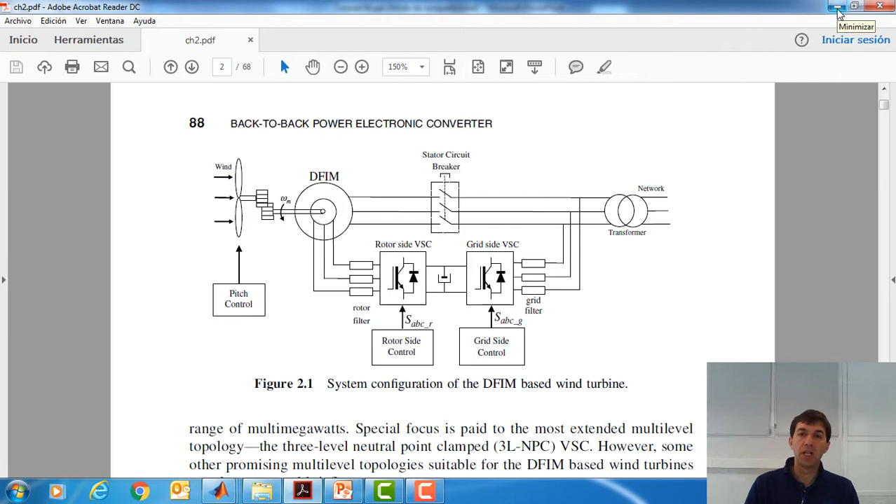And we will do it in MATLAB Simulink. So if we open MATLAB, we have already created the Simulink file from previous video tutorials, and this is our starting point.

So if we go to the power circuit, this is the thing that we need to implement. Okay, so let's go to the Simulink program. It's here. Let's make it a little bit bigger.

The first thing that we need to do is eliminate the DC voltage source, and we need to duplicate the power electronic converter. Let's rotate it and then flip the block. Yes, it's okay.

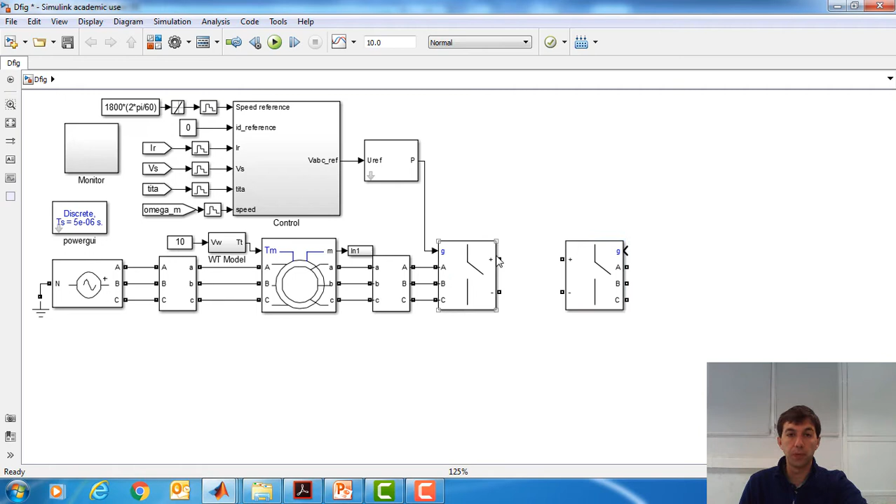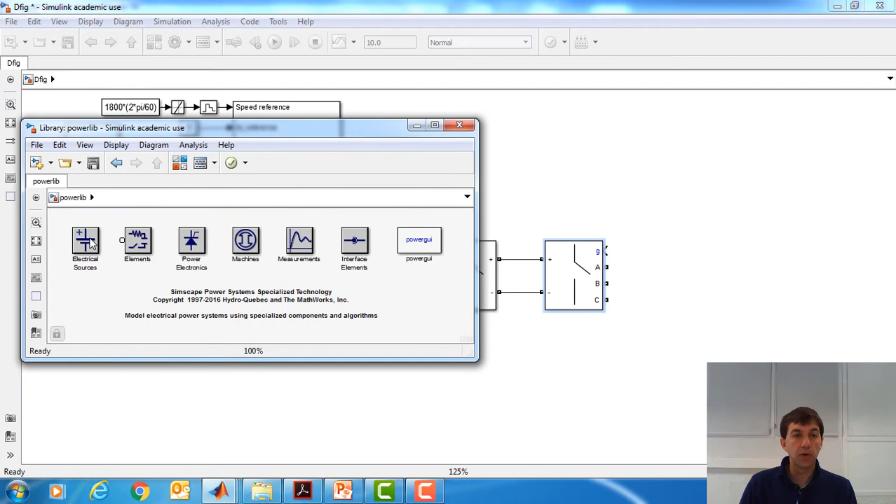Then we need a DC bus capacitance here. Therefore, let's open the library. And from the power library, that element should be, for instance, here.

So let's take one, it doesn't really matter which one we take. Let's rotate it. And we take only a capacitance of value C-bus.

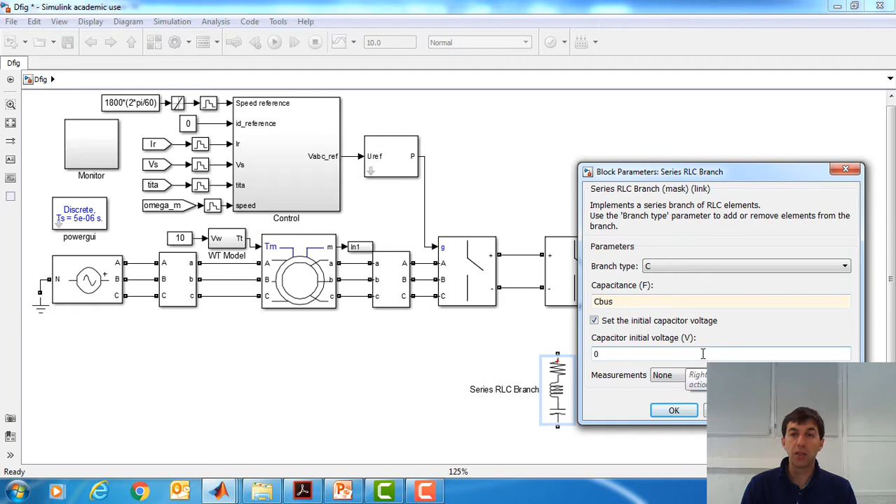We can set the initial capacitor voltage to the DC bus voltage, to the normal operation DC bus voltage, or just to 0. Let's do it at 0, for instance.

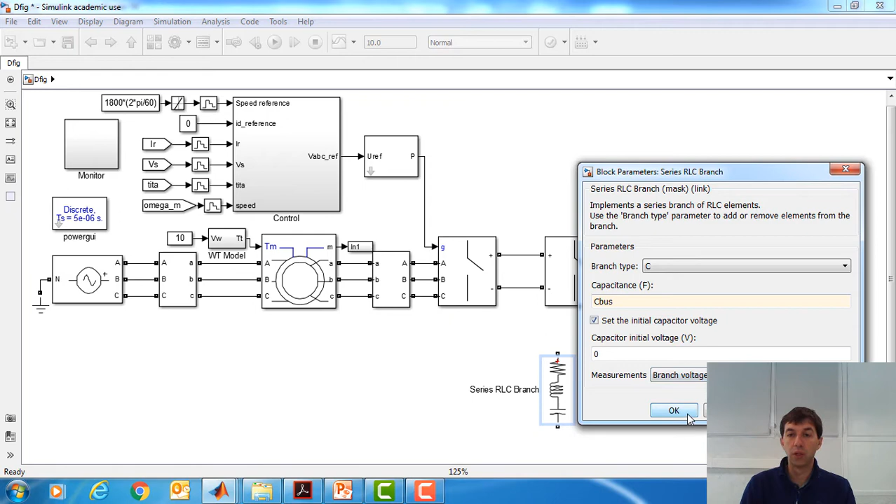And then we will need to measure this voltage. So let's take this DC voltage from this part, branch voltage of the block, which is already prepared. Then we can eliminate also the name.

Okay, we can save, and we can make this element a little bit smaller. So we can place it here.

We have the initialization program. From the previous program, I have included some new lines, those ones in here more specifically, and here is the DC bus voltage that we are going to implement.

It's a quite big inductance, but if we use a capacitive and inductive filter, a combination of capacitance and inductance, we could make the series inductance a little bit smaller, but this is not the objective. And here we have some other parameters related to the control that we will speak about later. Okay, here we have this.

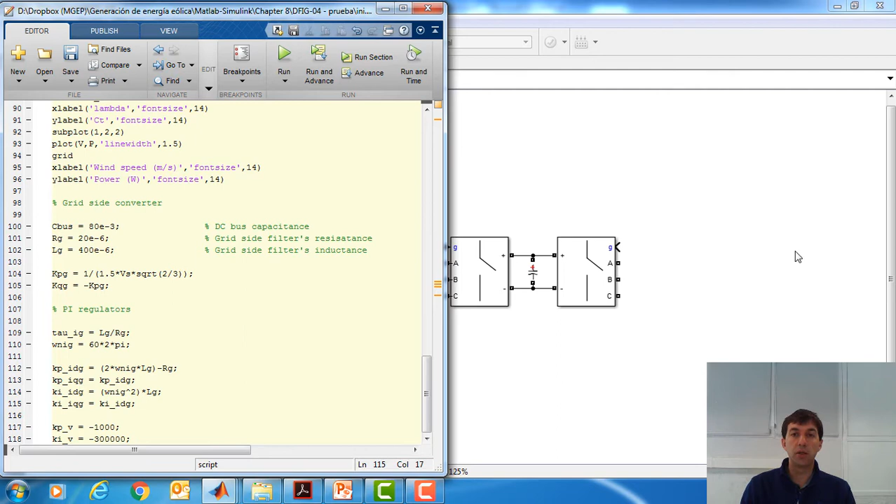Therefore, we need, as we have said, some more elements related to the filter. So we can use again this element, copy it from here, make it a little bit bigger, and we will use, as said, resistance and inductance filter.

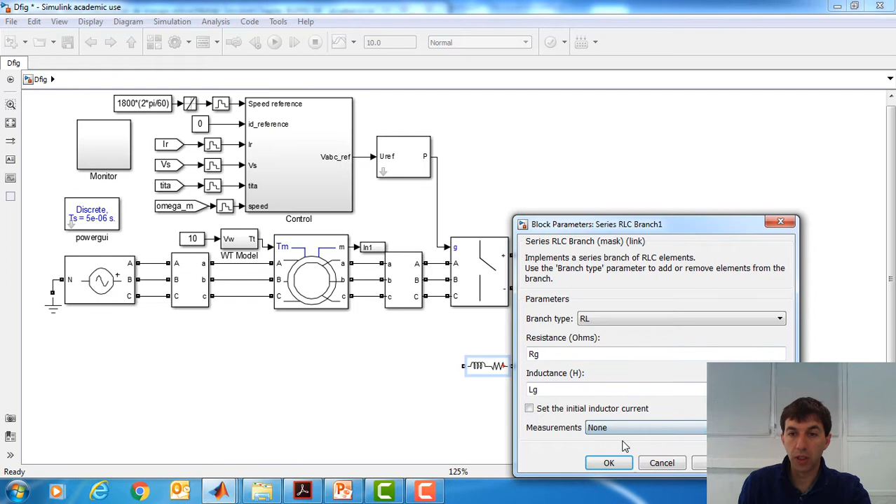RG and LG, if I'm not wrong, sorry. And we won't use any measurement in this case. Let's do it that way, and let's check where it is. Here it is, yes, the two names are those ones.

Okay, so we copy them. This is the filter that must be placed between here, here. We need a little bit more space for this third wire, and here.

Then we need a measurer that could be taken from this part, and this must go to the filter. This is A, yes. This is B, yes. And this is C.

A, B, C, and B. C, B, and A. Okay.

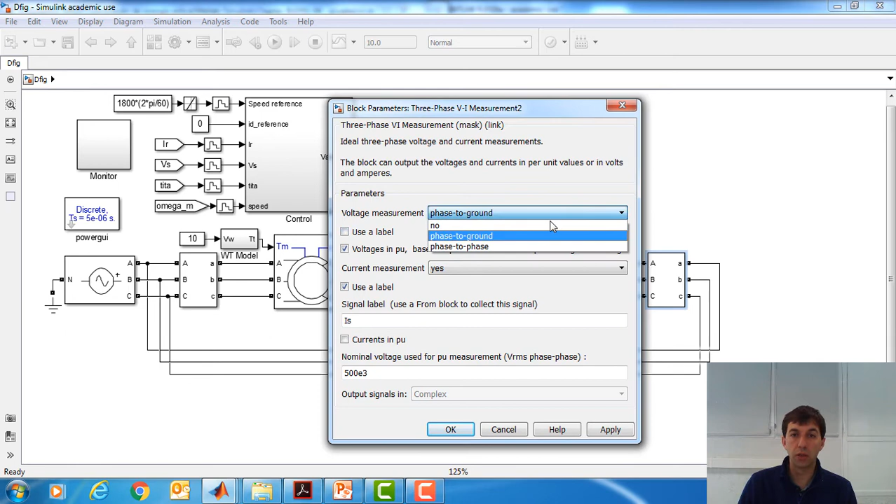Let's call this, we won't use voltage, and let's call this current IG current.

Okay, so this is the power circuit, and what we need now is, in order to operate here with the grid side converter and rotor side converter with real voltages, we need to place a transformer into the rotor side.

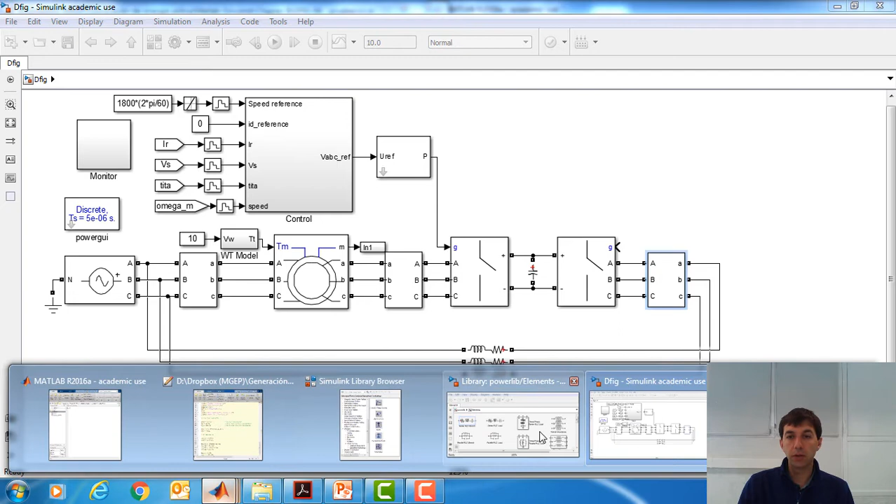So let's find the transformer in the library, which is probably here. Let's make it bigger. Yes, this one.

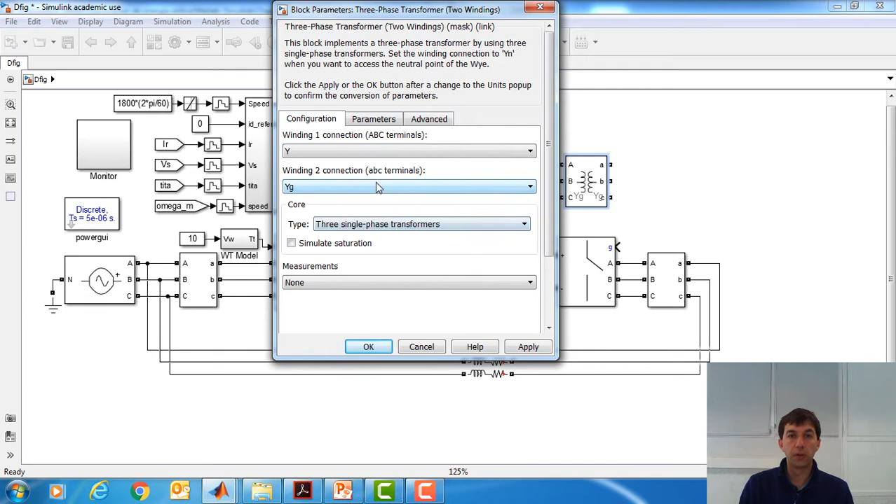We remove the name and we choose a simple transformer like this, with parameters that don't really matter, but anyway let's do it this way, and let's open again, let's show this file again.

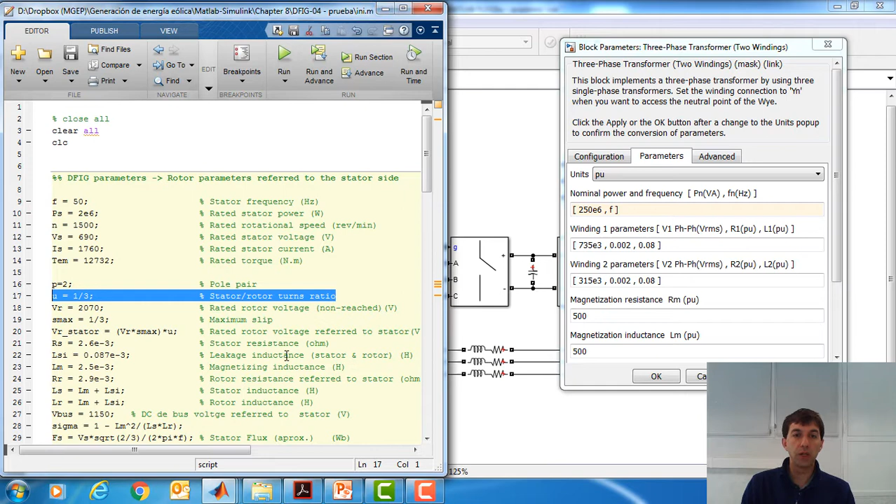Just remember that this machine, this doubly fed induction generator that we are using, has a stator and rotor turns ratio of 1/3. So in order to simulate this fact, we need to include in series with the power electronic converter, between the generator and the rotor side of the generator, this transformer.

So let's make a little bit of space. Like here. Sorry, SI units, for instance, and this is okay. So we need to place it here. Let's make it a little bit smaller and a little bit bigger.

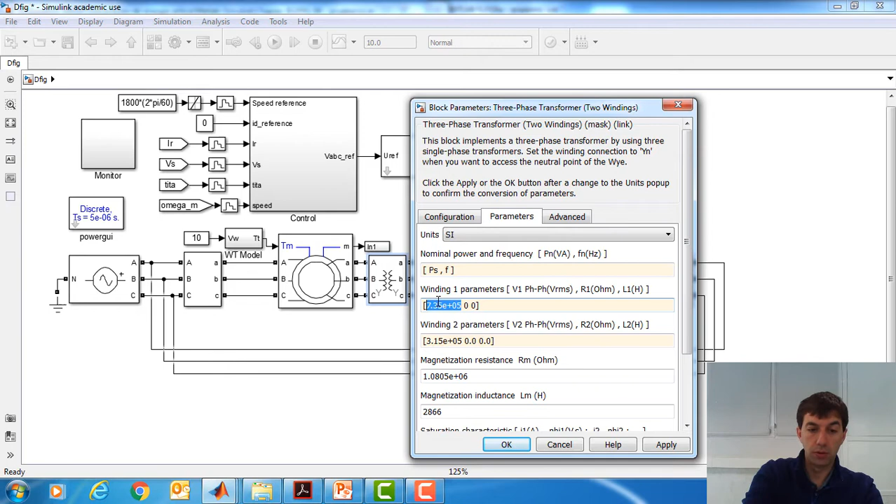Seems that everything is already connected. So the parameters were F. We can put here PS, which is active power, and this we are required to introduce or to put here volt amperes, apparent power, but it doesn't really matter. Which is important is to place or to do zero the parameters.

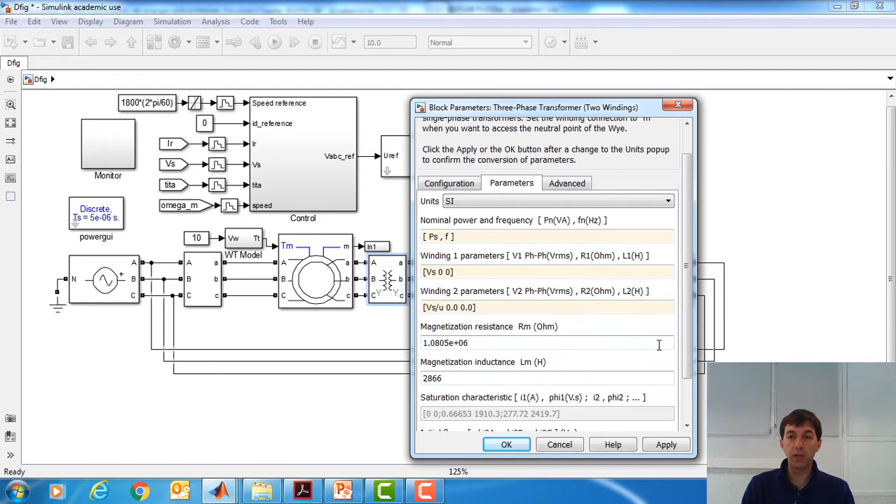Since the only thing that we need is the relations between voltages of the primary side and secondary side, so with this we have an ideal transformer. Let's leave the values of the magnetizing resistance and magnetizing inductance at very high values, so here the only effect of this transformer is just to implement the stator and rotor voltage relation.

So okay, so there we have. Okay, let's continue then, doing a little bit more space. Okay, it's enough. So we need to continue now with the modulator, I guess, because the power circuit is already implemented. So we just copy the modulator, the PWM modulator from here.

One thing that we are going to do is to set the initial phase of the triangular to zero, because in that way we eliminate some asymmetries that maybe in this grid side converter will be more remarkable. So let's do it at zero and just do the same for the other power electronic converter for the rotor side.

Then we need to implement the control. Let's see the power circuit from the book. We have already created the power circuit, and we need now the grid side control, which is going to be very similar to the rotor side control. Therefore, one simple thing that we can do is just copy it from here to here.

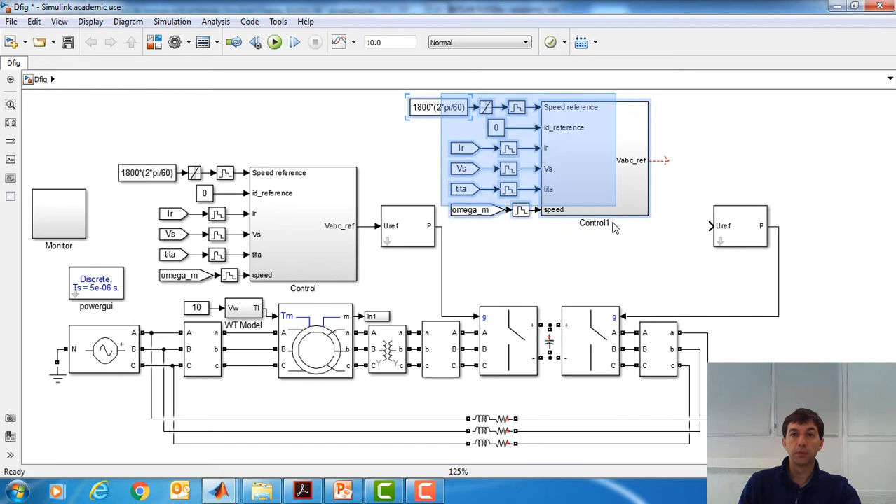We need some more space. Somewhere like this. More or less there. This is not connected. Yes, now it's connected. Let's move there. Okay.

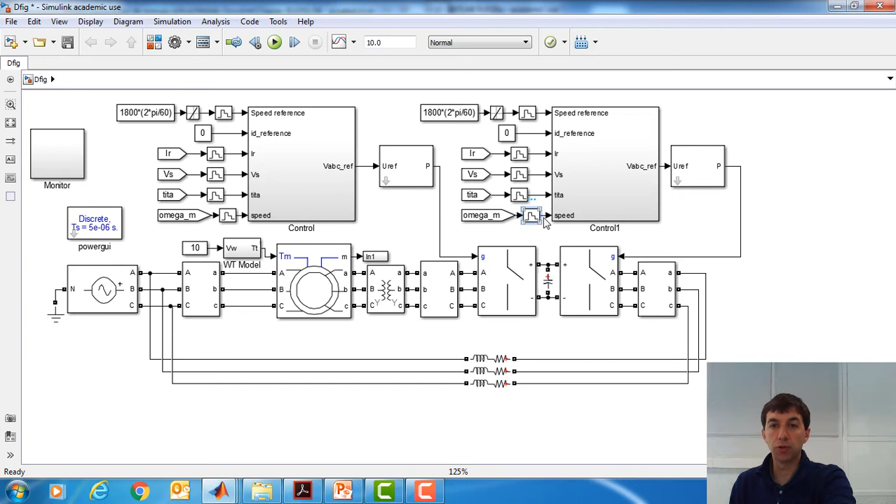So what do we need from here? Basically omega, we are not going to need it, therefore this is not useful. Neither theta. Stator voltage is going to be necessary.

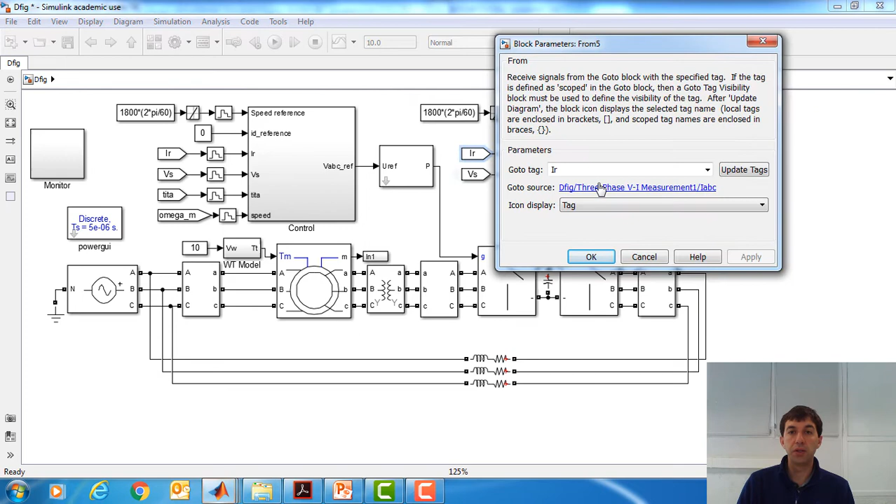Okay, so let's go back to the program. So we will need IG, which is this current, okay, and it must be positive going out from the converter to the grid. So it's okay. Then here we have the stator voltage.

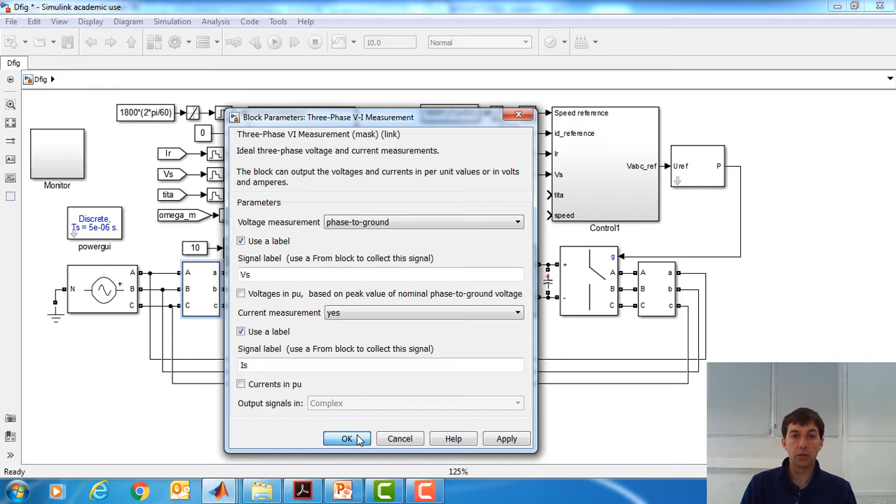This shouldn't be now in per unit, should be in units, because later we will see that we are going to use it, this voltage, at the controller strategy itself. So this is, and then what we need is the DC bus voltage.

Okay, so let's go inside this part. Let's do it bigger. Okay, so one is DC bus voltage. This is going to be QG. This is going to be—we have said that we don't need the speed, we don't need theta. This current is going to be the grid side current, and finally this is the voltage.

Okay, so we don't need this block anymore, we don't need this, we don't need this, we don't need this. Yes, okay. So now this is the block.

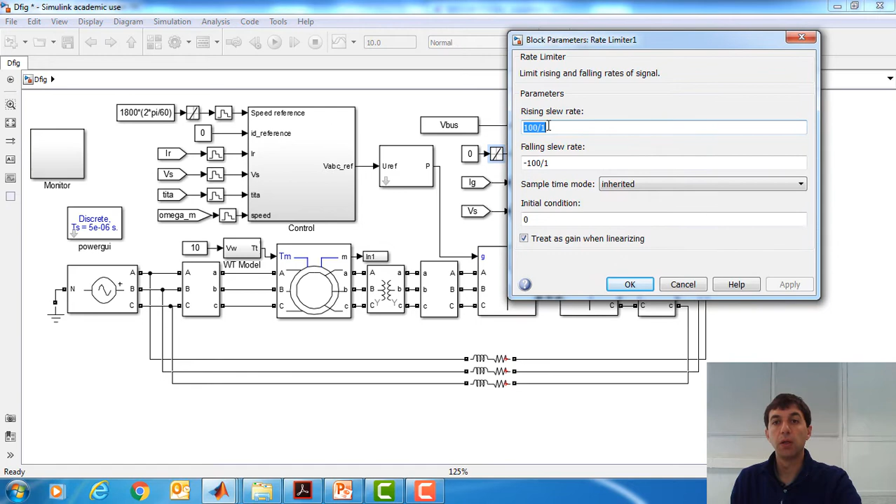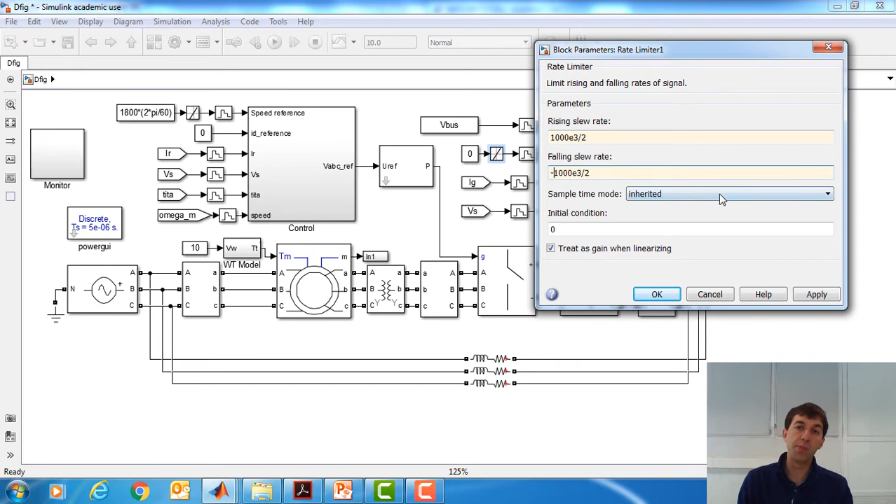Okay, so here we can put the Vbus. We don't need the rate limiter. But here at the reactive power reference we could use it. And let's put, for instance, 100 kilovars per second, or 1000 maybe in 2 seconds, and the same in negative, 1 megavar in 2 seconds. Later we will check if this is a reasonable slope or rate limitation.

Okay, so let's continue implementing the control. Okay, so first of all we can check, for instance here we need to estimate the angle theta of the grid voltage. Therefore we need to come to this block. We don't really need this, we don't need this, we don't need this, and neither this. And this is theta of the grid.

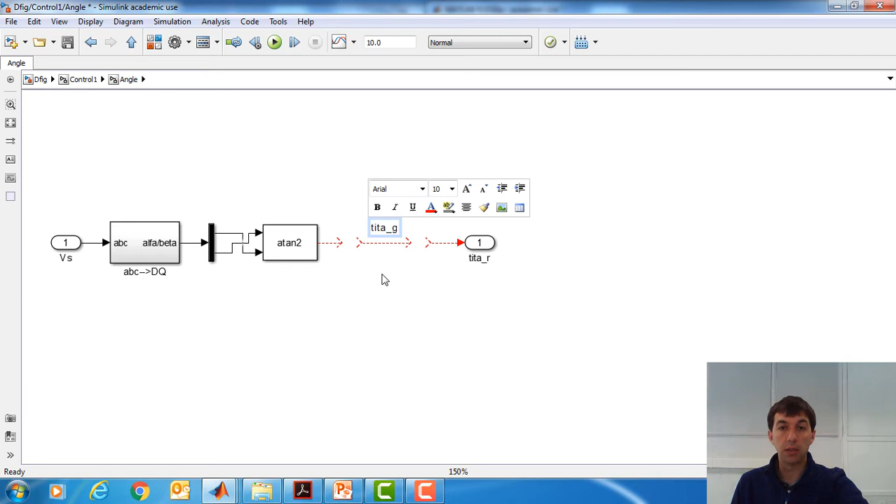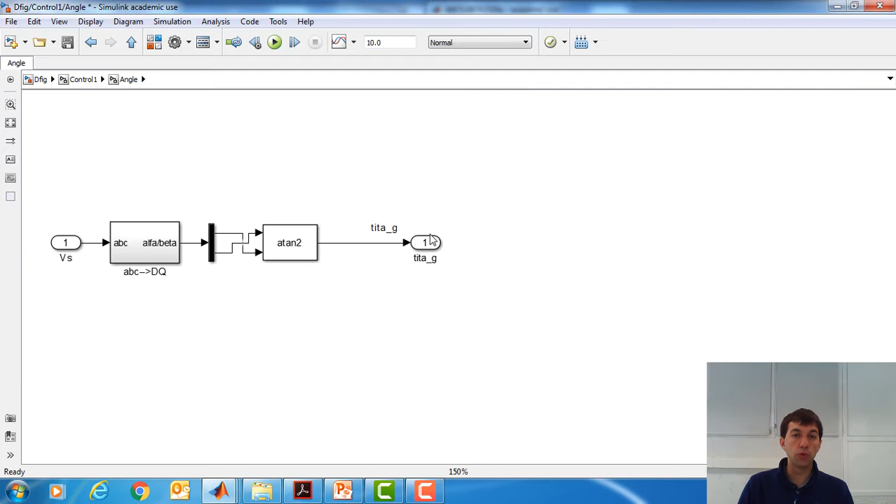It is more recommendable to use a PLL, but as we are going to perform a very simple and initial stage simulation, we are going to estimate the angle theta of the grid very simply with this element.

This is alpha and this is beta. So we are going to use the transformation from ABC to alpha beta, and then calculate the angle directly with an atan2 function.

So this is the plot now, very simply. Then here we need the grid side currents in alpha beta.

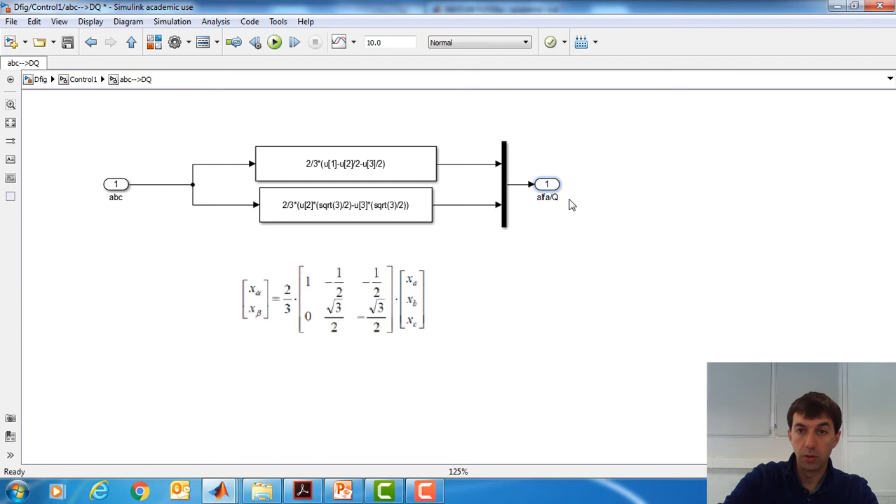Again, we are using the same transformation, but we give different names to the coordinates. This is alpha beta, this is alpha beta, and this is alpha beta.

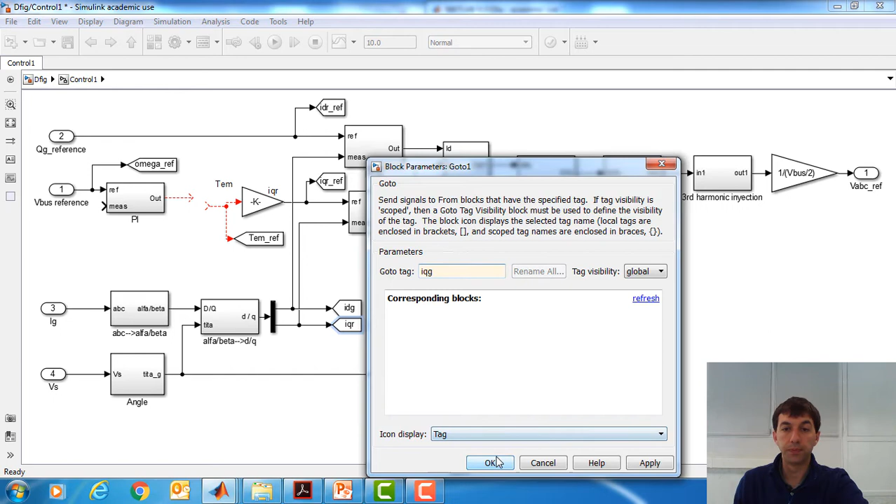So everything is correct. Now let's call this IDG global, okay, and IQG. And the opposite transformations should have the same names.

Alpha beta, alpha beta. This transformation is like this. Sorry, here... there we go. I think that everything is okay.

We can save. So now these are going to be the currents. Yes, so let's continue from here.

For instance, the current references are going to be IDG and IQG, since we are working with the grid side converter control. Let's have a look.

So here it is what we have already implemented. From the DC bus voltage, we need this PI regulator, and here we need a constant.

We need to connect it here and connect it there. Here is going to be this label, like this. Okay, I have forgotten to put here a new input, the DC bus voltage, which is coming from here, we have said.

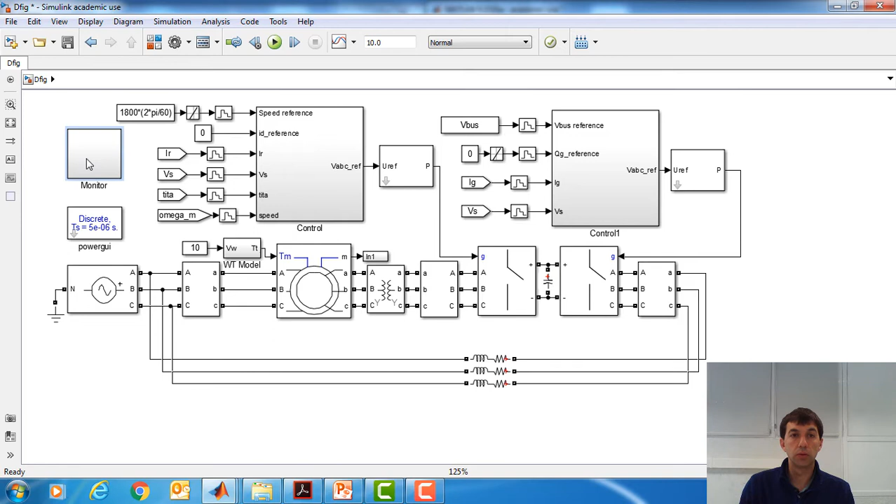Okay, so let's do it from here. For instance, let's go now to the library, not this one, but this one.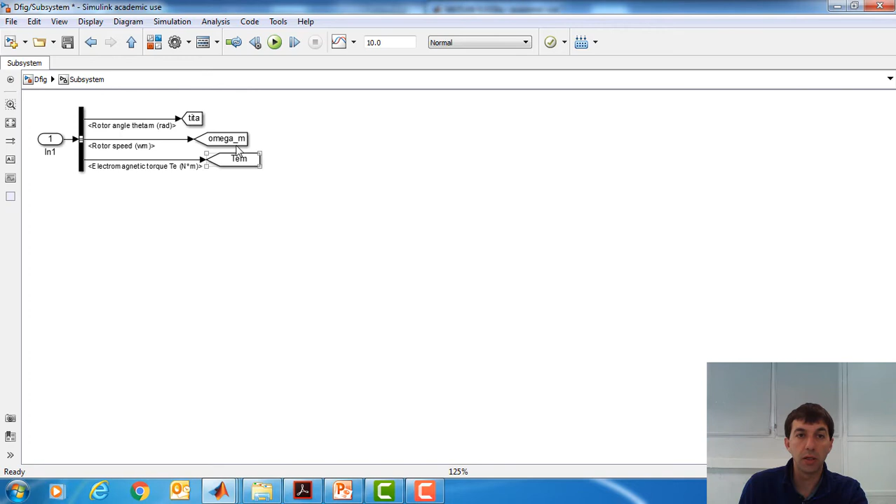And we need a measurement. Yes, let's use the multimeter, and we will use another front to block that we can take, for example, from here.

Let's go back there, and this is going to be the DC bus voltage that we can call in this way.

So we need to associate from the only series RLC branch that we have.

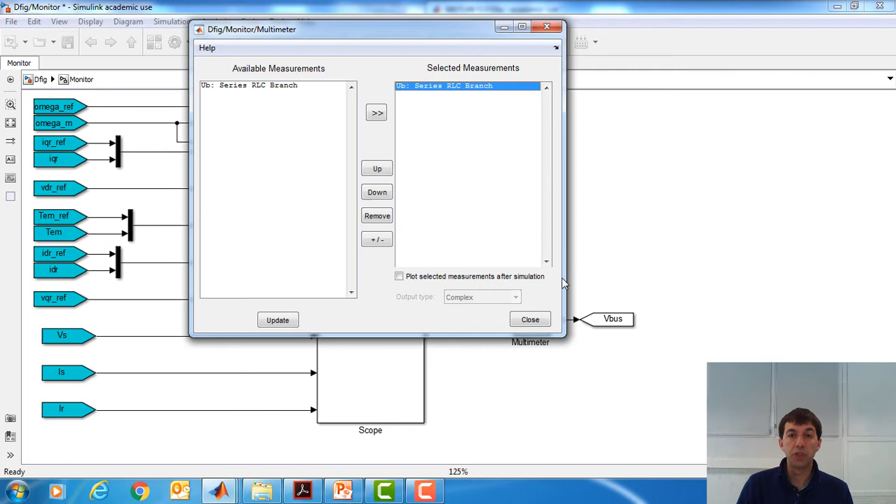Okay, we will take the voltage. Okay, and later we will use it.

Just here. So let's take it, for instance, let's take another input, paste, and this is going to be the third one, fourth and fifth. Okay, and this will be DC bus.

Let's put it there and let's connect to the PI controller. Then this reactive power reference is going to be directly connected.

Sorry. And this is going to be, not torque anymore, so QG reference. So this is not necessary, it's obvious, and this is going to be IQG. So I think that everything is here.

Okay, yes, this is what we have. We can save.

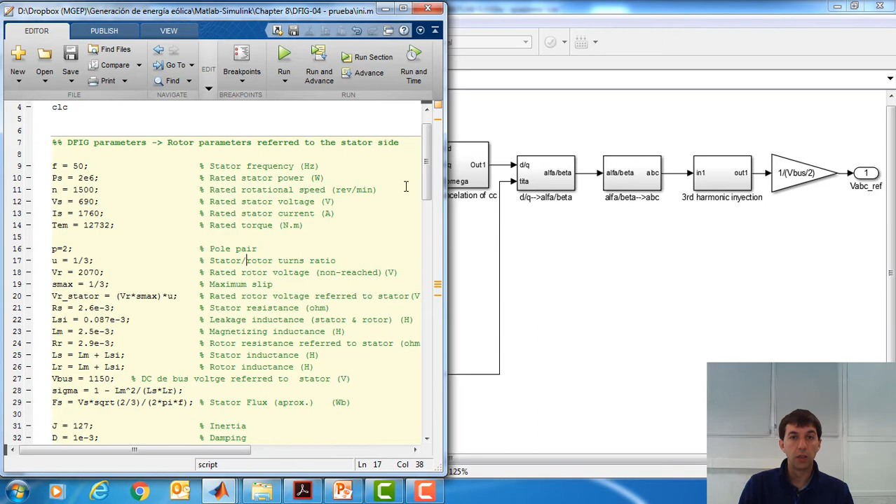Let's go to the initialization program again, and let's go to the last lines that we have included. Here we have the constants that we need.

This is 1. Sorry. And this is the other one for the reactive power.

Okay, then we need to set the parameters for the PI regulators. In this case, there we have the DC bus voltage regulator.

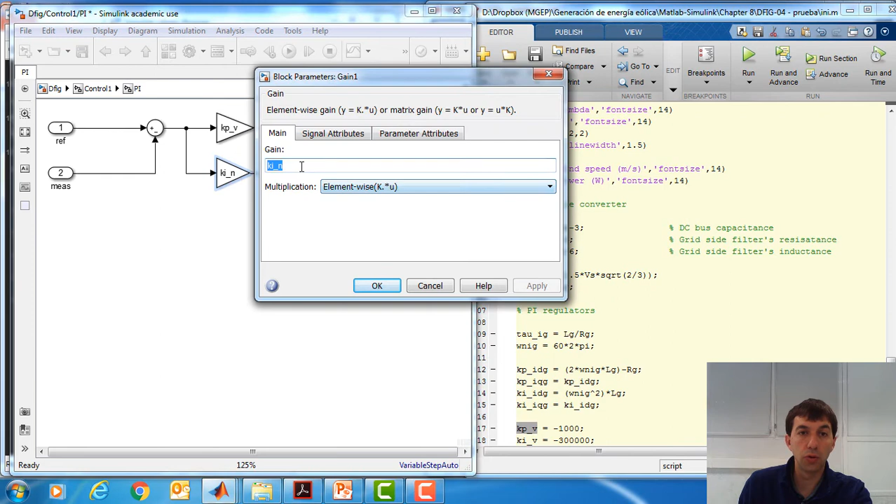This is going to be, okay, the proportional gain, and this is going to be the integral gain.

The output of this regulator means here active power, and therefore we could put here as limitation, here we have the active power, and we have a maximum S equal to 1/3.

So let's say that we have PS multiplied by U, by S max. Yes.

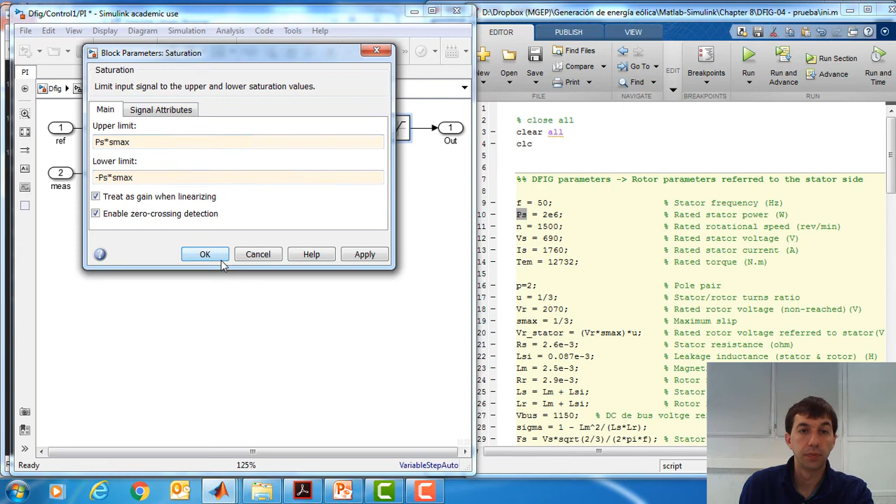In positive and in negative, the same. Okay. Initial condition, okay.

So the maximum active power that should go through the rotor side converter will be the maximum rotor power, which is given by this value that we have set here.

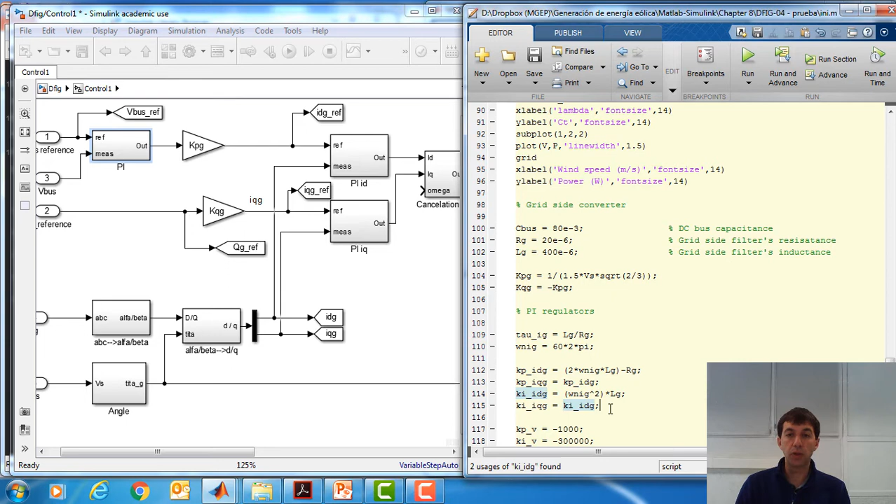Okay, let's continue with these PI regulators. Let's go to the current regulators, and here we have tuned the proportional and integral gains according to this very simple criteria, which is the same that we have used for the PI controllers of the rotor side converter.

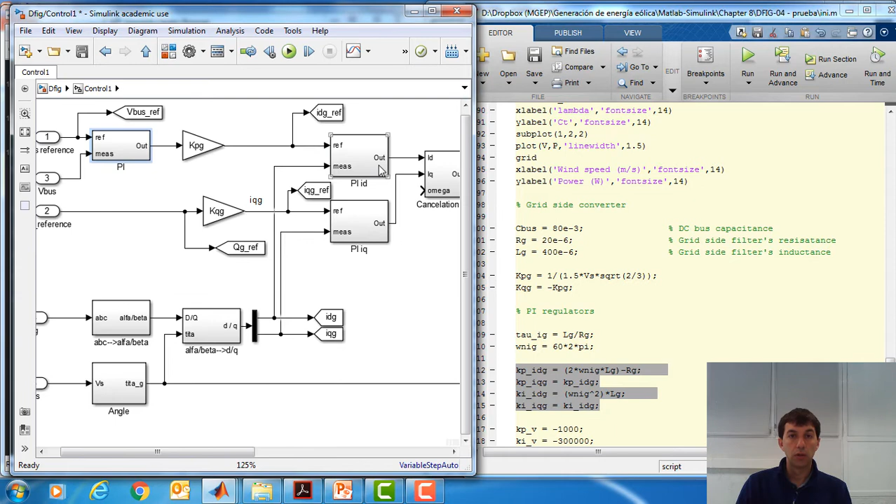So let's call IDG, okay, same names but with G. And the maximum voltage, the limitation, the saturation should be the same here and here as well.

Okay, this is for ID and the same for IQ. Well, the same values are useful, so Q,G, and here Q,G.

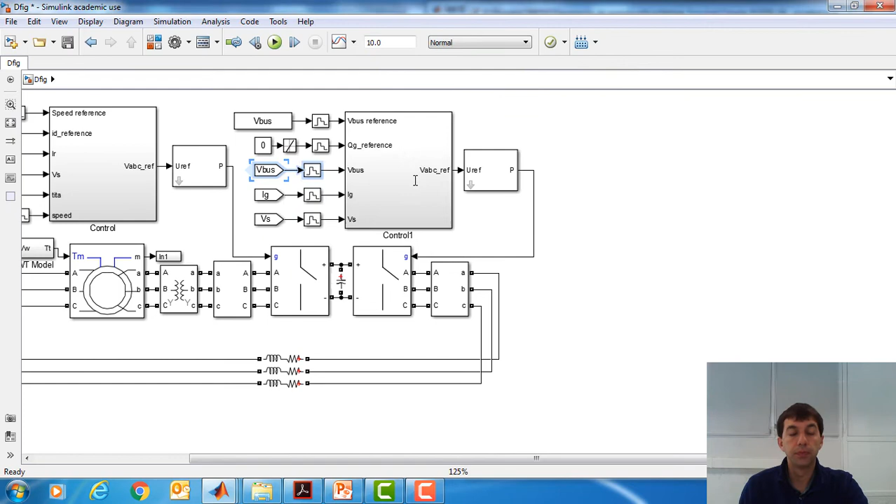And here now what we need again is to put here the new input, which is the DC bus voltage, according to its name. Okay, so I think that everything is there.

Yes. What else is missing? Okay, those are the constants. IQG, IT. Yes, the coupling terms.

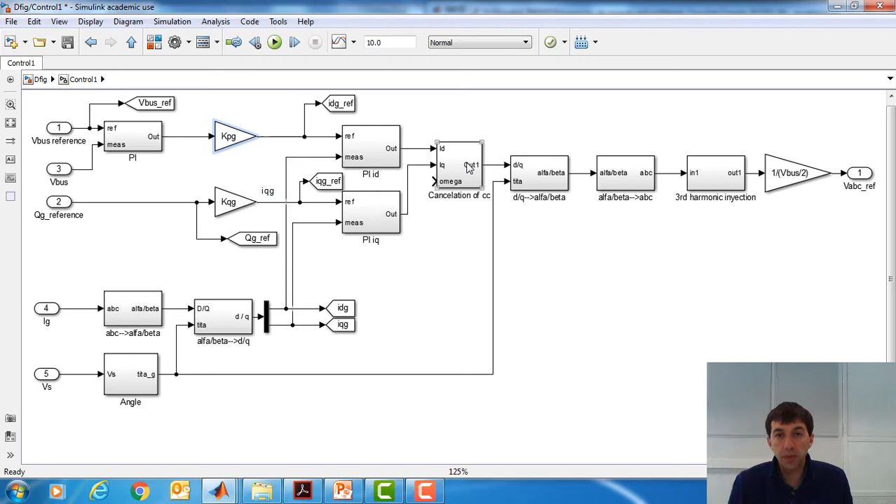If we go to the coupling terms, we need to add these two values. So, okay.

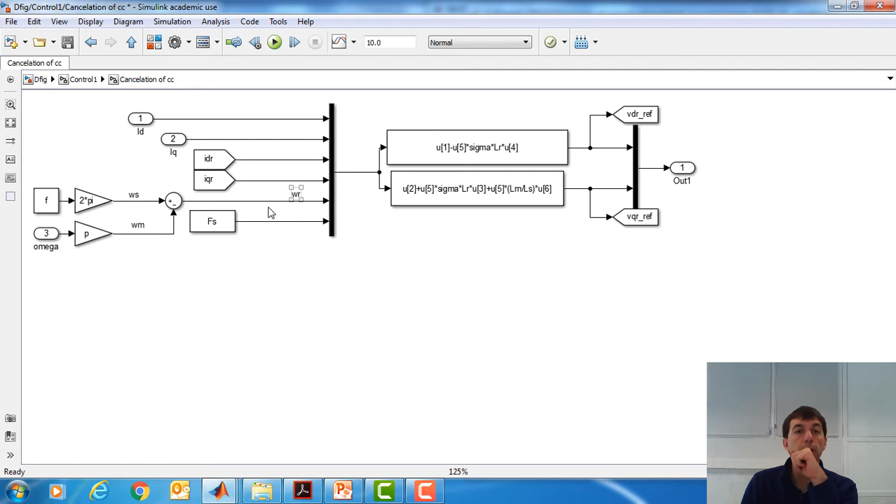We need to do some modifications here. What we need here is IDG and also IQG.

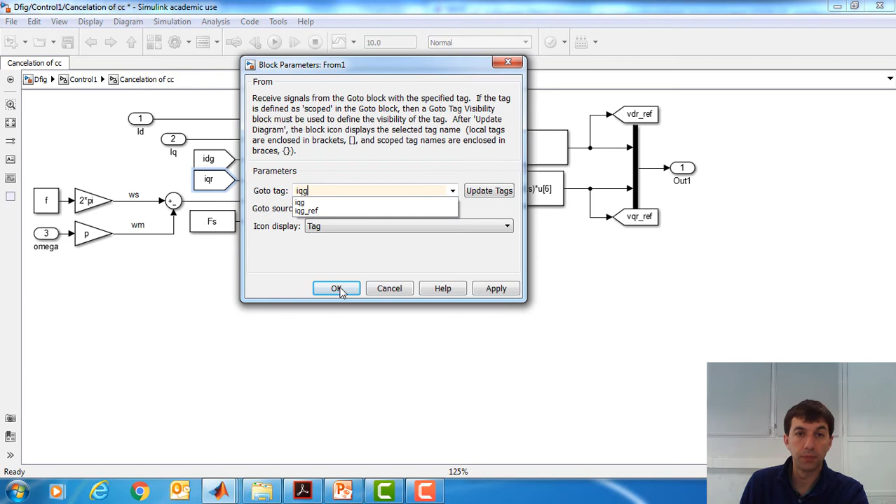Okay, we don't need this anymore. This was for the machine. Okay, so we need only 4 inputs for these multiplexers.

Yes, like this. And here we will have the coupling term, okay, this is U4, which is IQ. This is LG, the grid side converter filter.

And here we could put this value. Let's copy this side again because it's going to be very similar here, but in this case in positive.

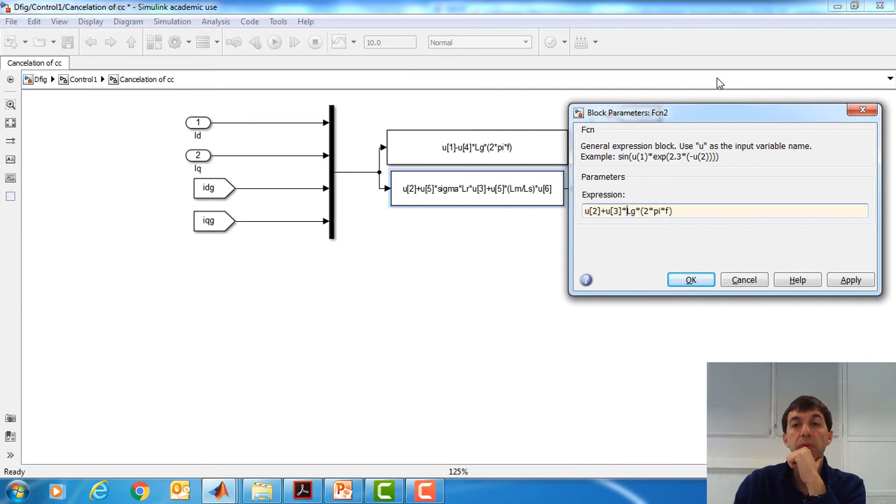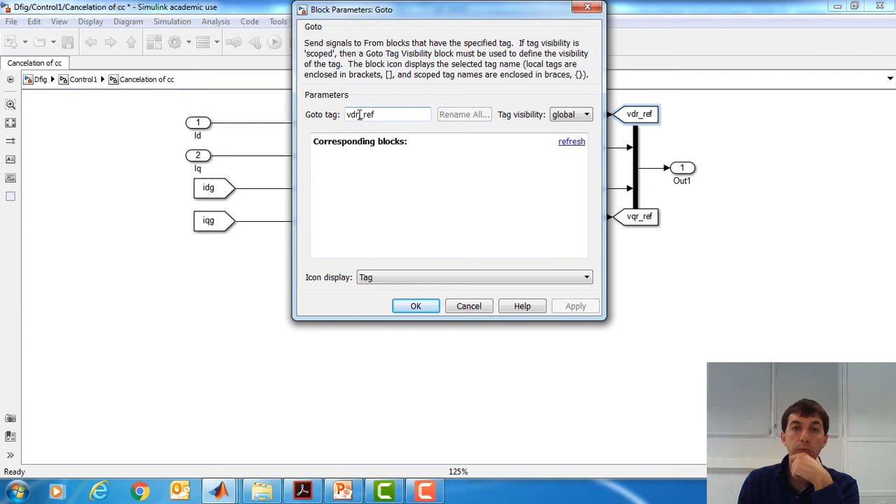Sorry, and this will be U3, LG and positive. Yes, this will be obviously not rotor voltage, but grid side converter voltage, and the same for the Q component. And that's all, I think.

Here we do the cancellation of the coupling terms. Here we have the third harmonic injection, nothing changed, and this is the voltage reference.

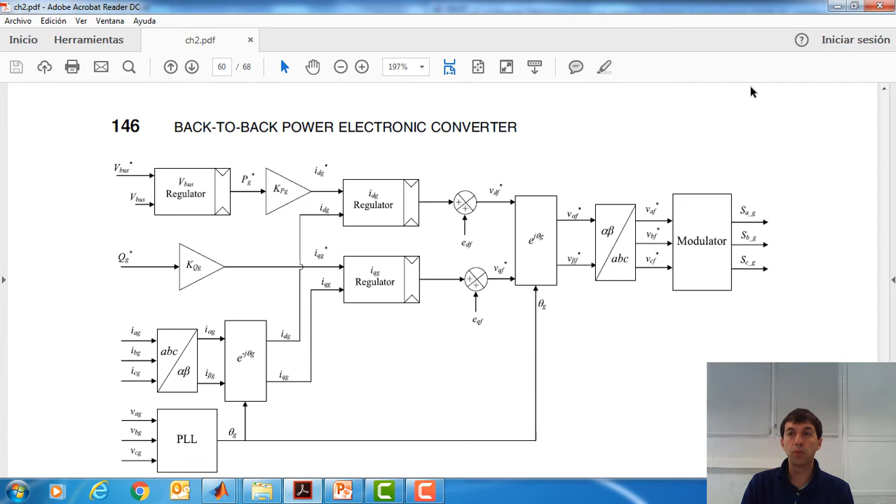Okay, there is one thing missing here, which is the grid side voltage compensation. We can do it, for instance, if we take one block like this from here, and just before this block we are going to add directly the grid side voltage, that we can take from the entrance, from this input in here.

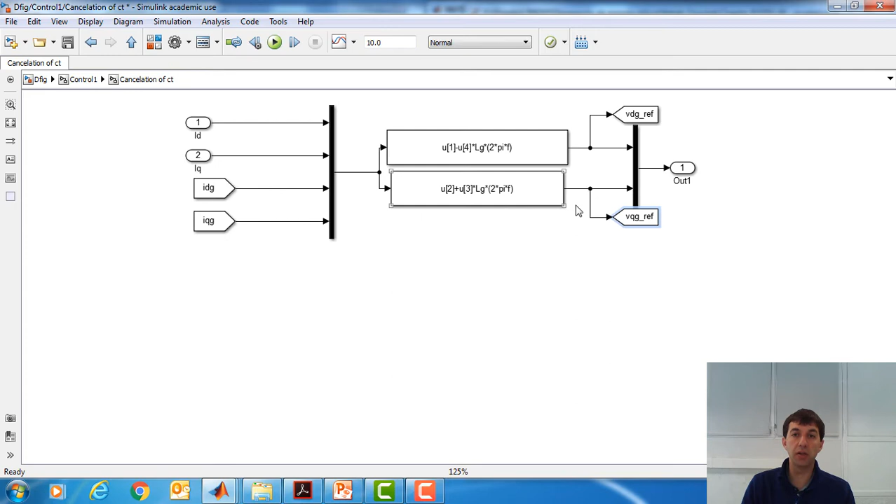We could cancel this grid side voltage, or help to the PI controllers, just here in DQ, but we can do it simpler in ABC, just add the output before the third harmonic injection. Okay, so I think that everything is already connected.

Let's have a look at the initialization program. Okay, so now we need to prepare the monitorization or the scope. So let's copy just directly from here in order to be simple. Like this.

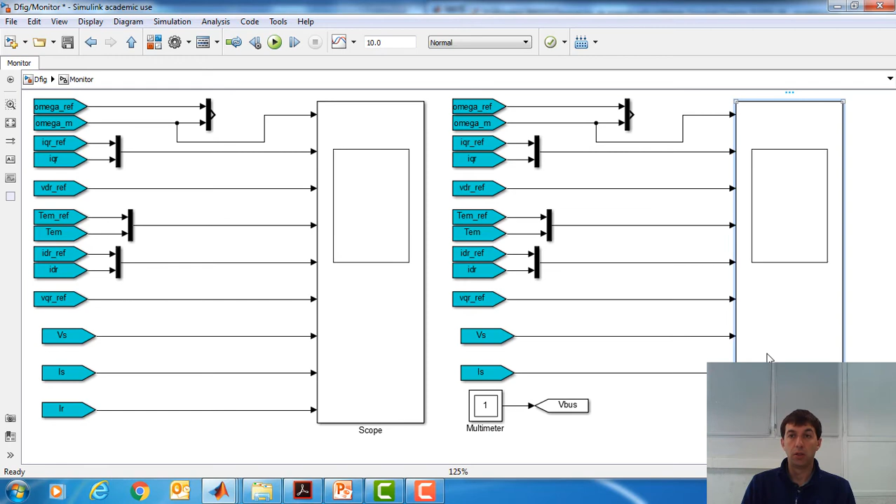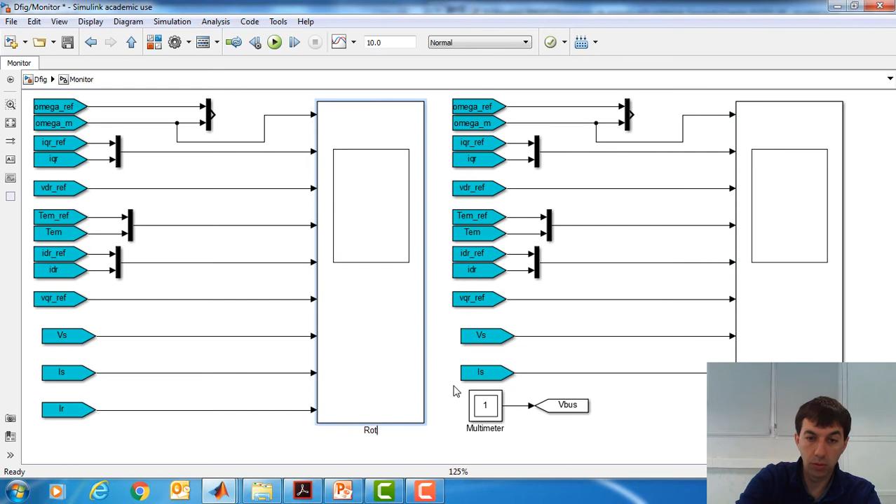And we could use the same structure as we did for the rotor side converter. We could use, for instance, yes, this is going to be grid side control, this name, and this is going to be rotor side control.

Okay, so here we could use, let's put it there, and this is the one that we are changing, grid side control, and this is grid side control. Okay, so we could say that this is going to be DC bus, and this is going to be DC bus. What happened? Didn't work.

Okay, so this is going to be its name, DC bus, reference and actual value. The DC bus voltage is controlling ID in this case, so this is going to be IDG if we want, IDG.

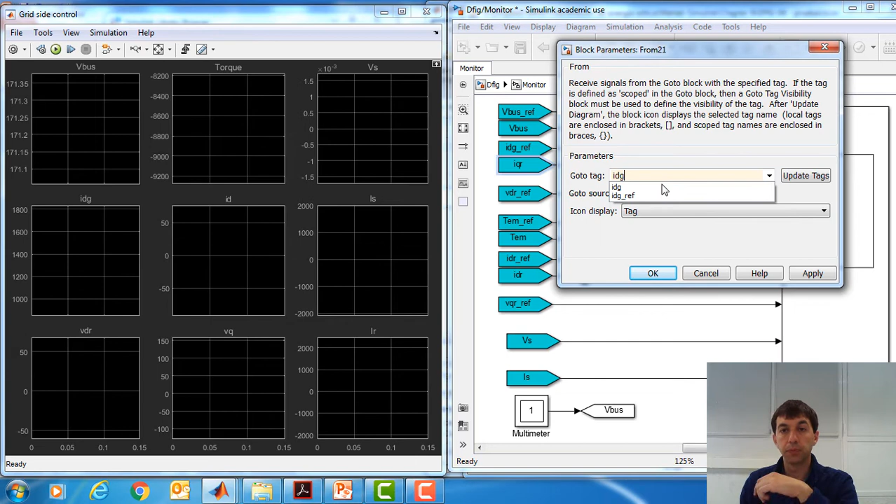Therefore this is going to be IDG, and this is going to be IDG. Sorry. Okay, and this will be VDG reference voltage, that we are taking it from here. Sorry, it is there, it is there, should be there. Okay, perfect. Let's go back to this window. Here we are. So this is its name, VDG.

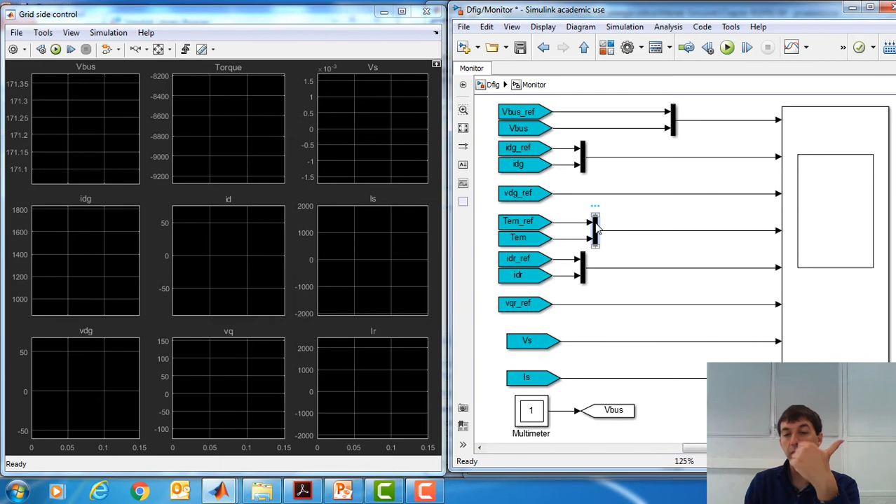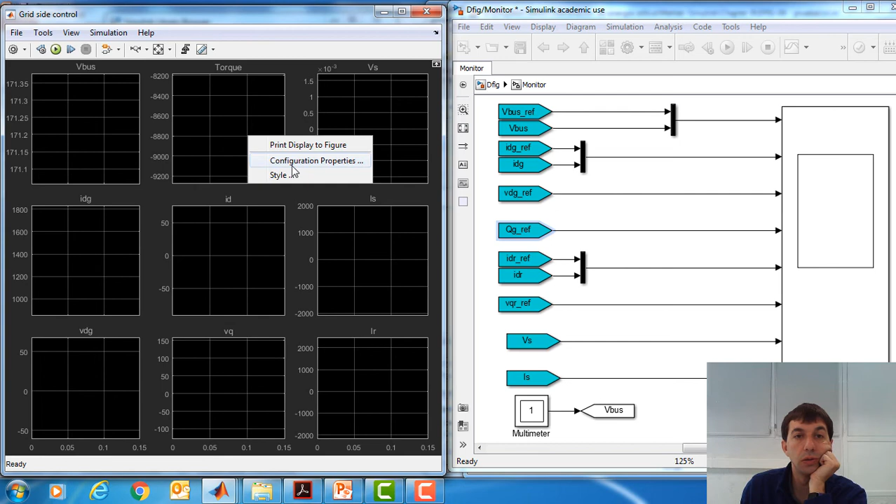And here we could put the reactive power. We just can watch the reference that we have called QG ref. So this is QG, in this case only reference. Okay, this will be now IQ. Yes, Q and grid. Okay, perfect.

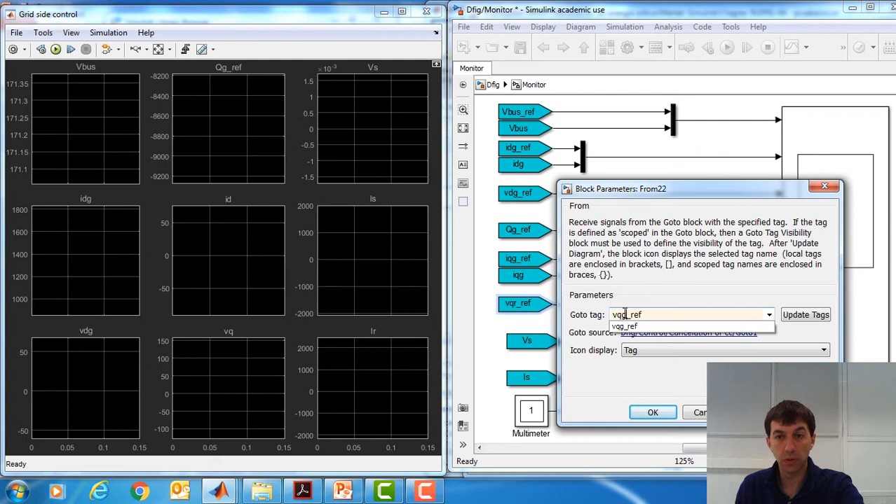And this is going to be IQG. Okay, perfect. And therefore this is going to be, yes, QG. Okay, so the names are wrong. IQG. Okay, and this is going to be VQG.

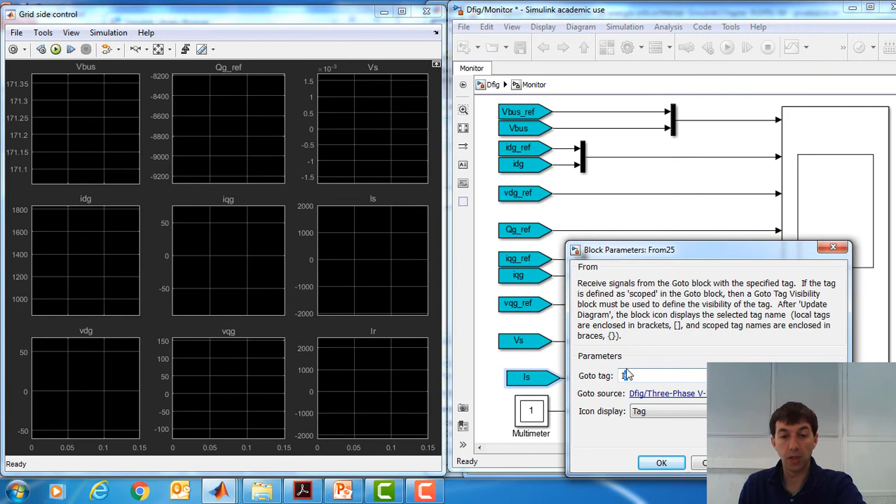Okay, here we could leave the grid voltage, and here we could use IG. Therefore, let's call it in that way, IG, the grid side currents, and here we won't use any variable. We will not use this element. Okay, so let's save this element. Let's check again. So everything should be ready. This is the grid side control, and this is the rotor side control.

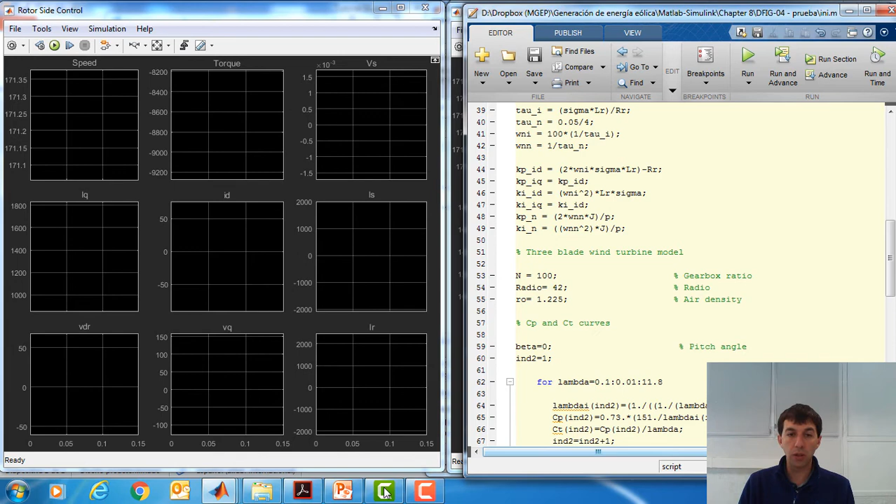Okay, let's go again to the initialization program. Let me emphasize that as we are going to do a startup of the machine, of the generator and the wind turbine, very strong, let me say, we are going to start up the grid side converter, the rotor side converter, the wind turbine model, everything all together at the same time.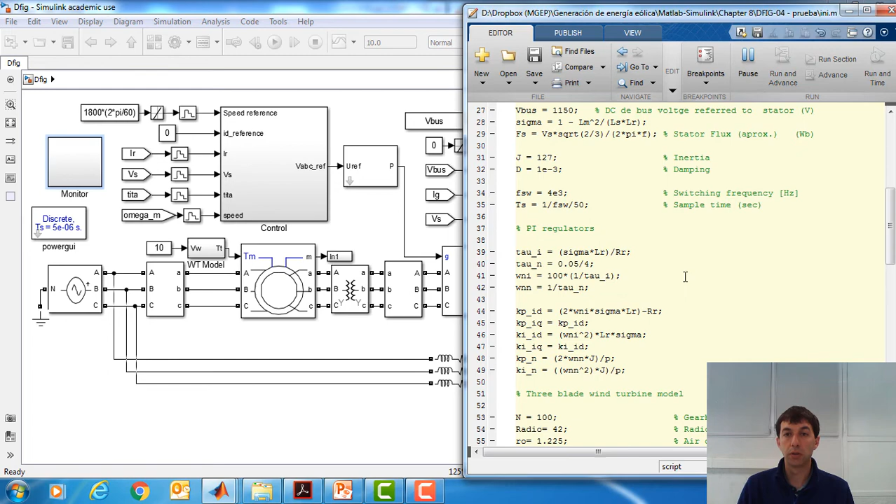Let me put the inertia as we have at the beginning, a little bit bigger, 127 kilograms multiplied by meter square. So we can run the program. Yes. So all the variables should be there. Okay. There we have all the variables already loaded there.

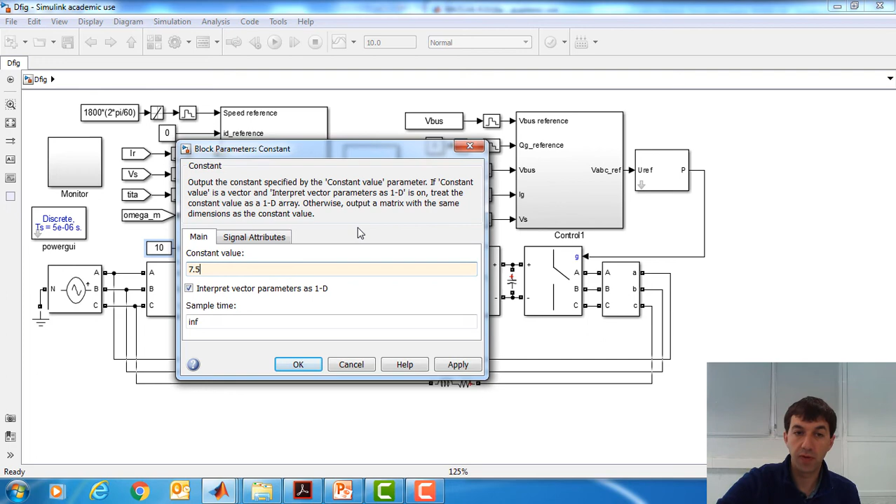And for instance, let's start at, let's say, for instance, 7.5 meters per second of wind speed. So this is 7.5, just to do a different value. Here we have the maximum power point tracking. Oh yes, there is one thing missing here.

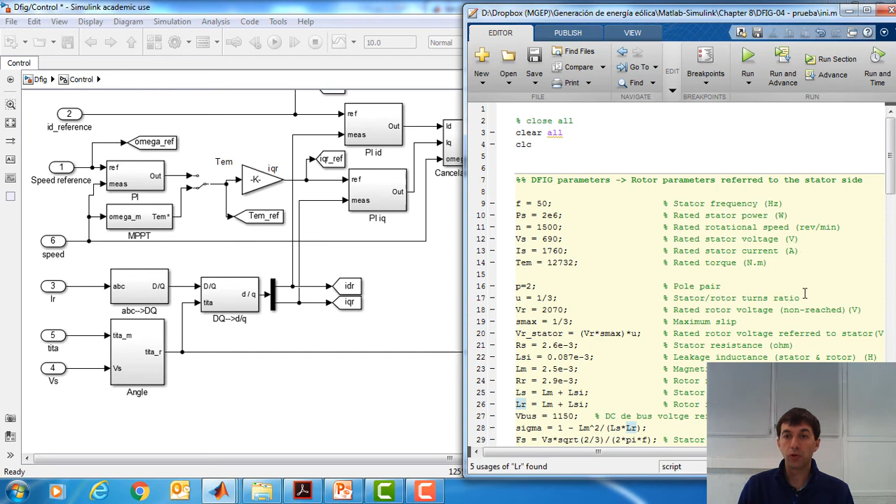As now, here we have the maximum power point tracking algorithm working. As we have introduced real rotor voltages and currents, here now the rotor side control should consider that. So very simply, we need to divide by U, which is the stator rotor turns ratio of this generator, and here should be placed at the rotor currents, and finally, again, let's do a little bit more space if we can.

We should do the same at the output voltages. So the control strategy itself works with the generator referred to the stator, but then it creates the output voltages, real output voltages, therefore referred to the rotor, obviously, and the current measurements are real measurements, so obviously referred to the rotor. And the parameters of the generator should be still referred to the stator. So we left them as they were.

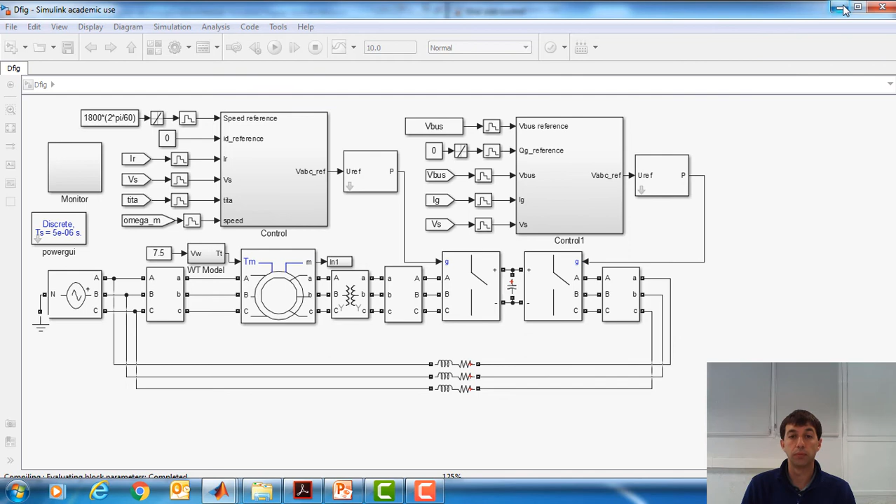Seems that is running, so we have been lucky. The simulation is running, and as you have seen here, there is a big overshoot of DC bus voltage.

This is because the startup that we are doing is very strong. We are not making a realistic startup because we don't have time to focus on it. And during this startup, the rotor side converter and the grid side converter reach their stable operation point, so the DC bus voltage is going down.

At the maximum active power that we have set, this is the current that it corresponds. So the system is running. Let's wait. And now it seems that the current loops are working.

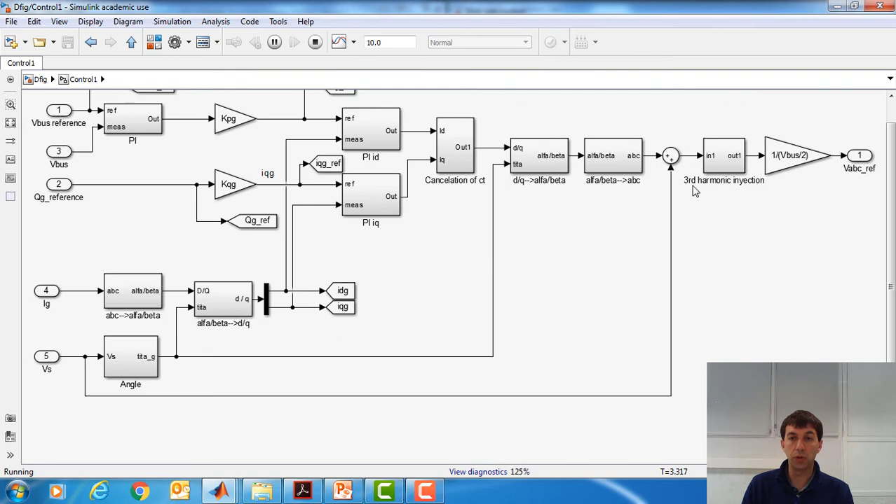In order to do that, we need something like 190 amperes at D current. These are the sinusoidal currents, and these are the voltage references. Very small voltages because, as you remember, we are using a feedforward voltage of the grid voltage. Therefore, what we are watching is just these voltages right here.

Okay, so more or less we have reached the steady state, and let's now simulate a different operation point at 11 meters per second of wind speed. In this way, the MPPT control algorithm operates with more torque and higher speed.

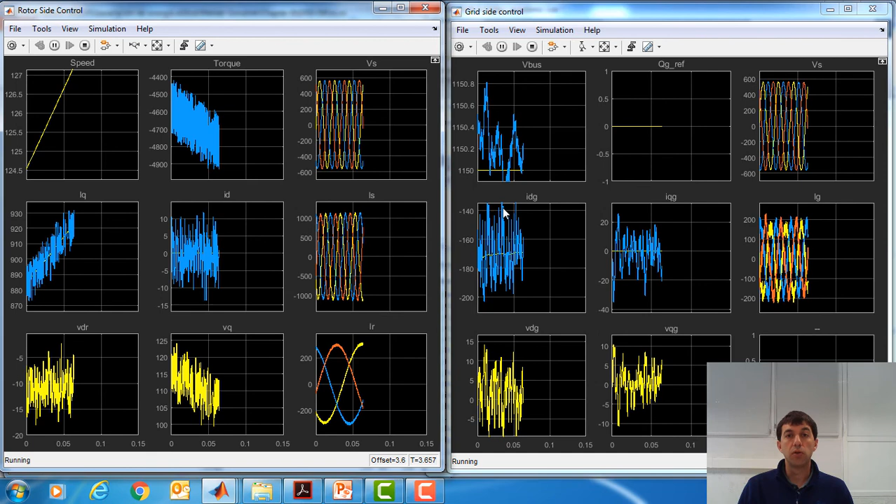This means that through the rotor we have more power because of this current, and therefore we see it as a perturbance. We could consider it as a perturbance at the DC bus voltage. So now this current is moving as well.

Everything, the operating point is moving, and here we could also just perform a variation of the reactive power at the grid side converter. Let's put, for instance, a negative value of 400 kilovoltamperes, reactive kilovoltamperes.

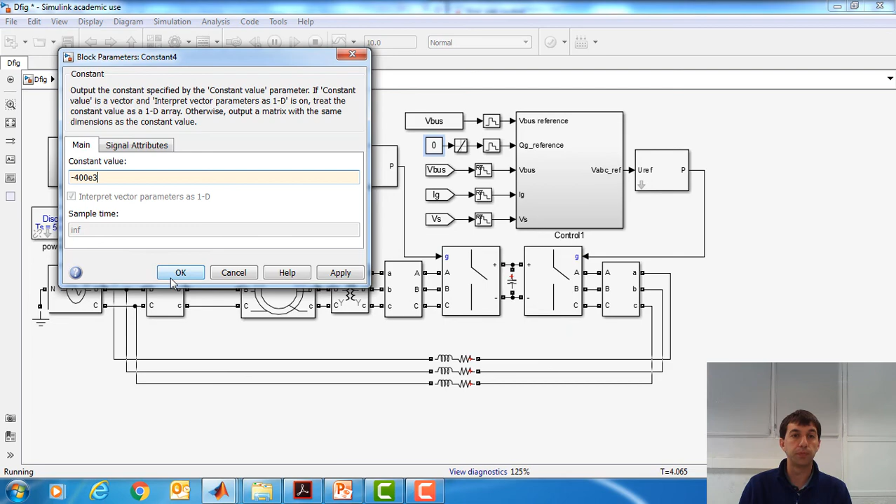This is the variation, and therefore the current, the IQ current for the grid side converter, is also being modified. Still the maximum power point tracking algorithm is working. Now we have crossed more or less the synchronous speed. So here we have rotor currents which are almost constant, and now we are at hypersynchronous speed.

Let's wait for the simulation. Here the rotor active power goes increasing again because we are in hypersynchronous operation. The current is going up, and here in ABC the current is also going up. And here we have reached the 400, negative 400 reactive kilovoltamperes at the reactive power of the grid side converter.

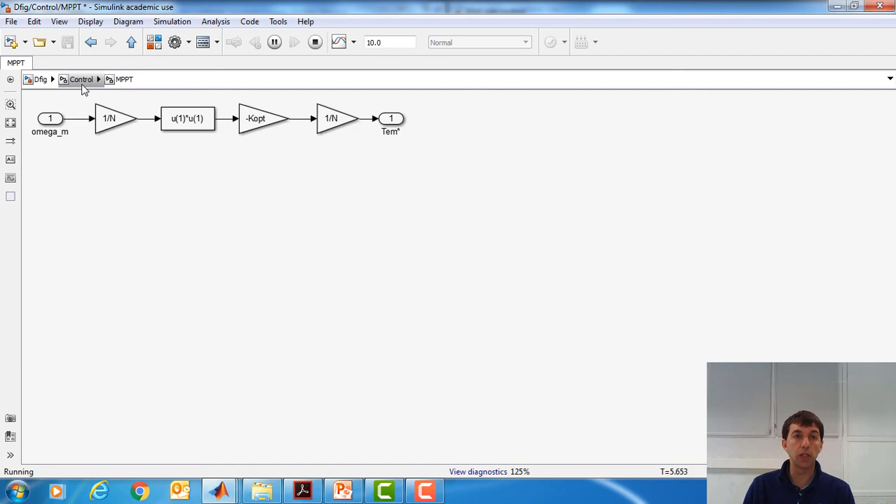This is the torque and this is the speed. The MPPT is still working. Just remember that we have an indirect speed control. We don't really have a reference for the speed control. The rotational speed of the shaft is indirectly controlled.

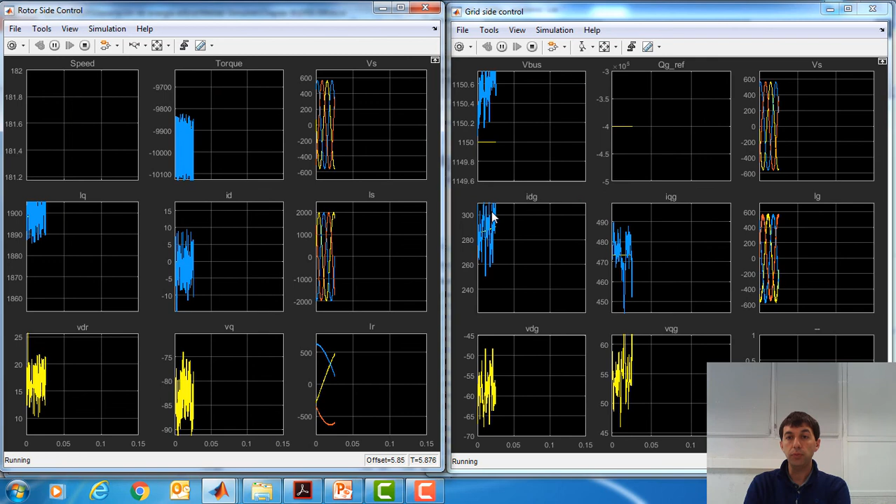Let's wait a little bit more. This is the speed, and now it seems to be reaching the steady state. For the rotor side voltage - the grid side voltage, sorry - this is the variation from the grid voltage, very small, 57 volts in D and something similar in Q. And now we have more or less stable operation conditions, not really reached, but more or less we have.

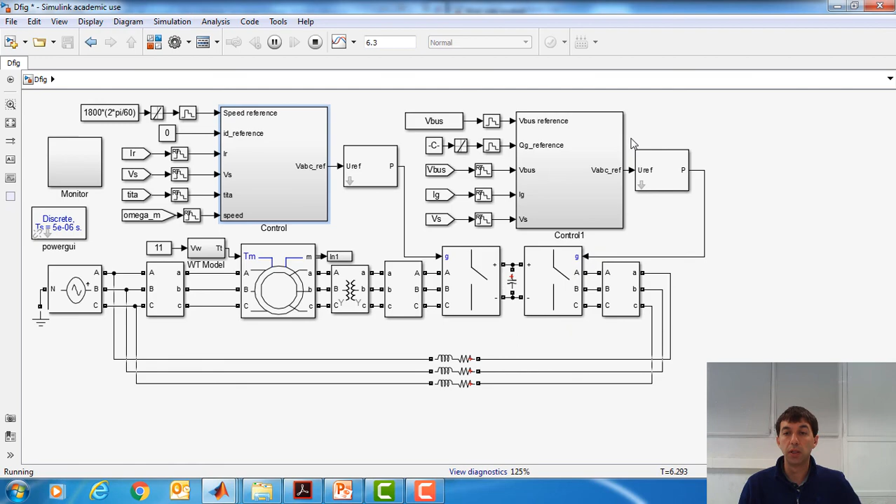So let's stop the simulation at second 6.3, for instance. Let's wait. And now we stop the simulation, and this is what we have achieved.

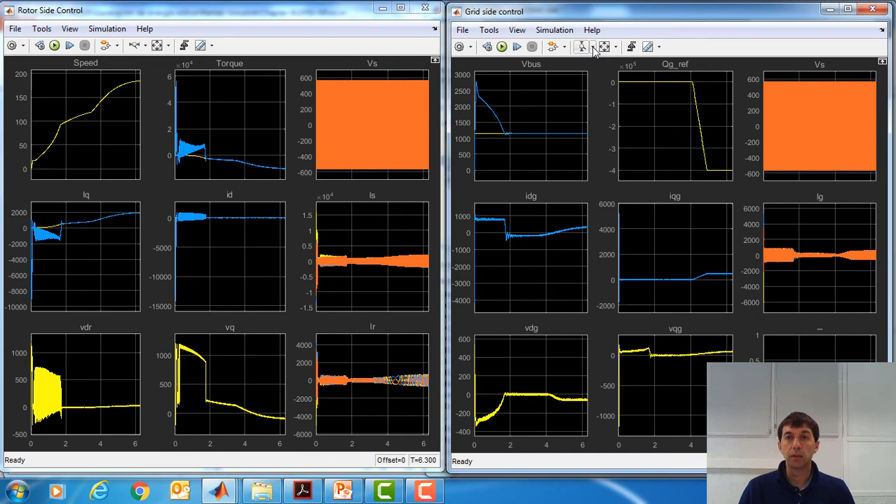So let's focus, for instance, at the grid side converter in the very last part from 5.6 seconds. These are the ABC currents. These are the D and Q currents performances. This is the DC bus voltage, and these are the voltage references before the feedforward term for the grid side converter.

We don't have yet the steady state, but we are very near. So 5.6 more or less should be... should be somewhere there, more or less, no, somewhere there, yes, more or less.

This is the rotational speed, not at the steady state yet, but very near. This is the torque. This is the ID current for the rotor. This is the IQ current. These are the stator currents. These are the rotor currents, and these are the voltage references for the rotor side converter.

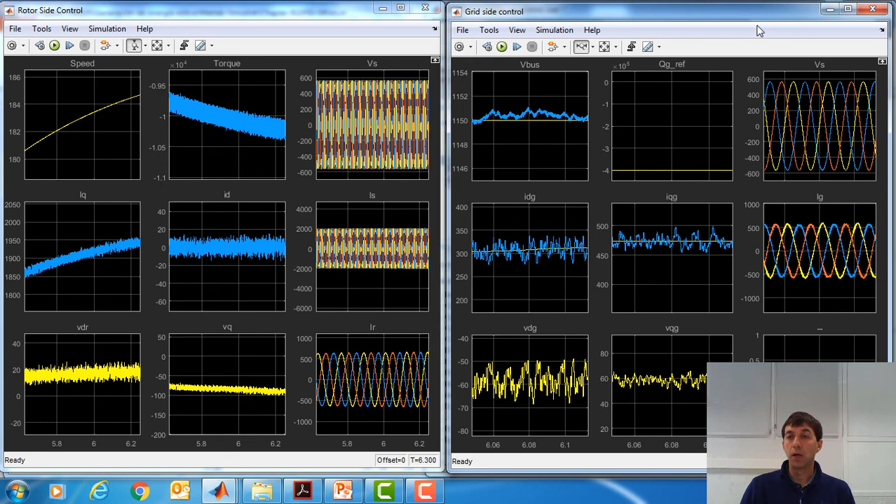We could do a bigger zoom. We could see with bigger details the current performances and voltage performances for the grid side converter. And that's all, more or less. So I hope it was interesting and useful for you. Thank you for your attention.